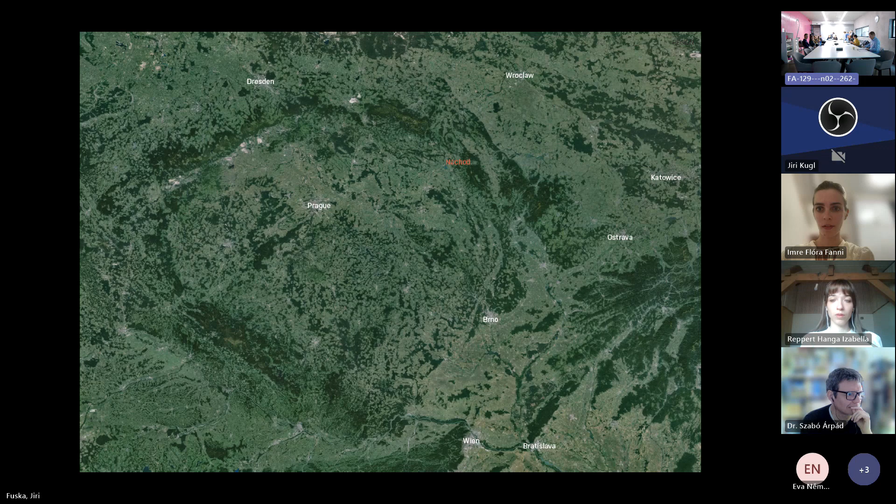It's on the border of the Czech Republic and Poland, right in the middle between Wrocław and Prague. It's an old industry city with a rich history of textile industry, still with a lot of remains of textile buildings, great big textile buildings. But it's lost its character, the buildings are empty and all the industry is gone. Today it's only a gateway to Poland for trucks, with this main road in the middle of the city going from east to west, so it's full of trucks.

So we are looking for some new character for the city, some new feel for the city, some new approach and goal, so the city has some future.

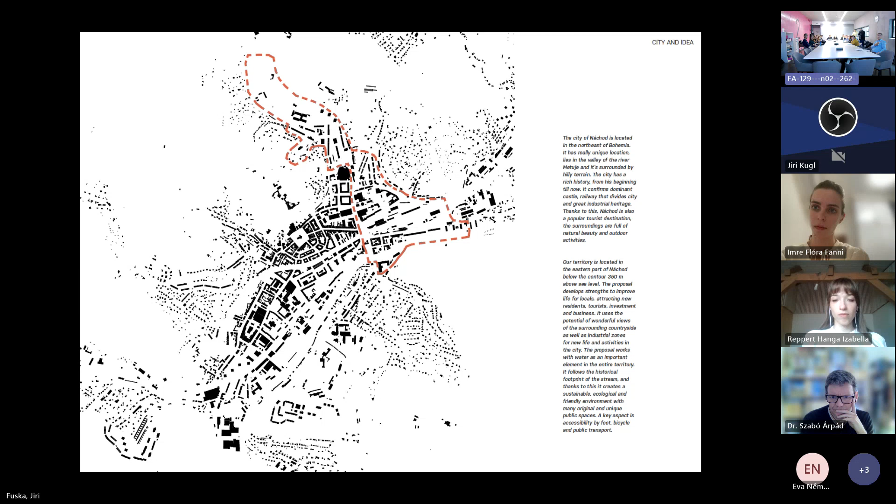Our group chose this part of the city, on the east part of the city with the train station and the panel houses real estate. As you can see, it's just next to the old city of Náchod, and it's pretty much low density in the built-up area, but of course the panel houses are high density.

So our approach was that the city shouldn't go further into the hills, where nowadays a lot of new family houses are built, but should stay in the valley underneath the hills. So, following the contour lines at 350 meters above sea level, we chose to densify this part of the city on the flat area.

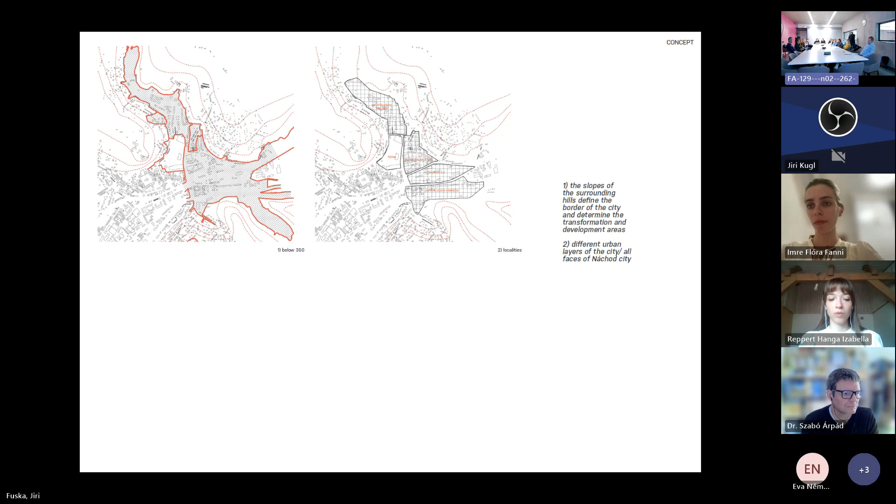We divide the city into districts with their own characters. On the north there are the panel house estates. On the south there is Tepna, the old industry textile fabric - there is already a project on it, so we just copied the project that won the competition. Then there's the industry area and all the brownfield around the train station, and on the south, the river banks around the river.

One of the main subjects of our proposal was how to behave towards the train station and the train tracks. In the future there should be a higher speed railway, so it will be quickly connected to Wrocław and Prague. So there's some potential for the brownfield and for the whole city.

Also, our colleagues in the studio were working on these viaducts under the railways. We found the local centers and added some more, so it's a short distance city.

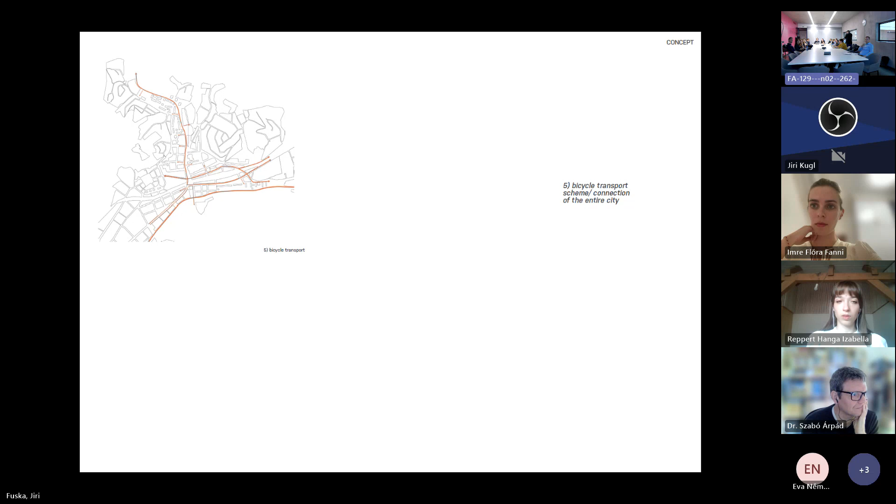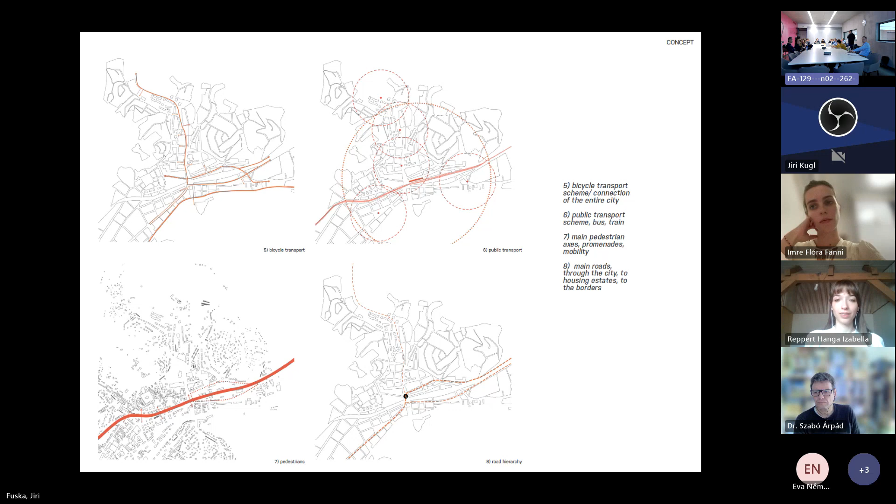Because it's a flat area, we think the big potential is in bicycle transport, so we made new bicycle trails and create new public transport. Because of a new city ring which is planned and will be built, it should take the trucks away from the city, so we created a new hierarchy for the roads in the city.

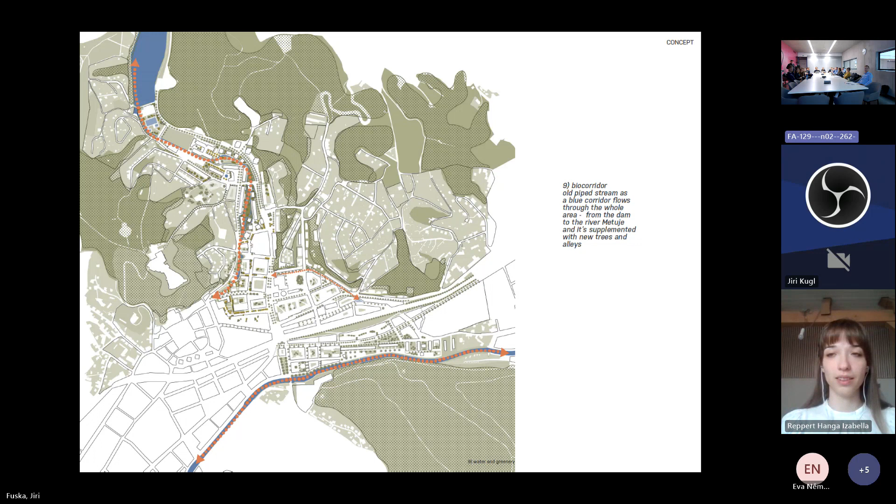Most important is this new welcoming of nature into the city, creating new bio-corridors into the city, so you can walk through the whole city, or part of it, in nature, in the city - something in between. So everything is close to nature, creating new pleasant public spaces.

So this is our proposal. We will start with the north part of the panel house estate, where we add low-rise buildings to be able to finance and create control around the public space, because nowadays it's just a vast area of grass that isn't used - it's just grassland, and in the future it's a question whether grass is something suitable.

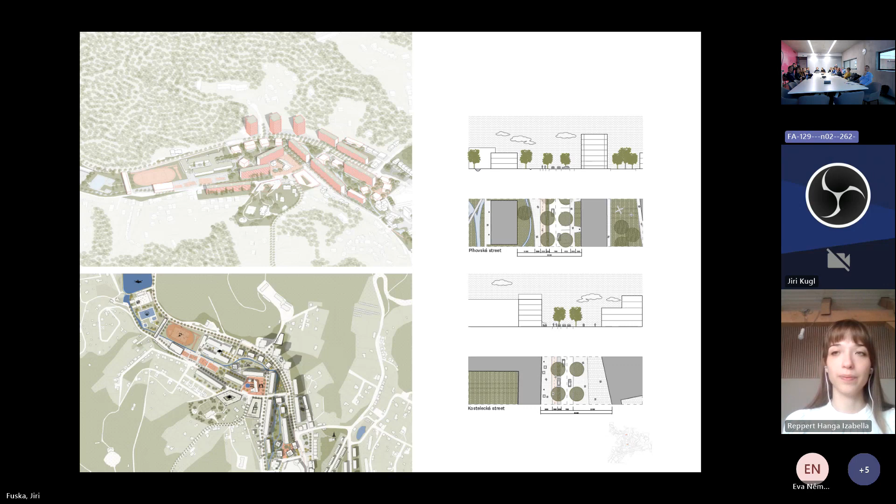So we open the river, which is now in pipes underneath the ground, and create a new sporting area and park around the panel houses. There's new biodiversity between the panel houses, and we create new low-rise buildings which take control around them.

So as we saw, there are 4 parts of the district. This is the second one, the industrial part, nearby the train station, where there's a heating plant. We want to build new public space, or keep the industrial heritage here but make active public space with it. The heating plant is still active, so we mostly focus on public space.

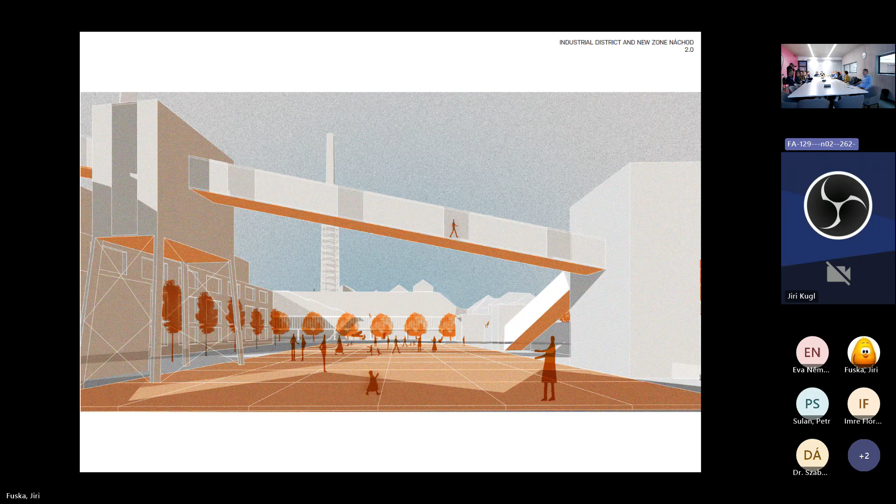For this, we want to focus on offering more opportunities to choose different types of housing, and mixing functions. It's mostly about having an industrial vibe with craft - on the basement there are working places for workers, and upstairs are living spaces.

So the next part is the brownfield part, for the train station. We want to show connectivity and access from the center to the new business and train station part.

So, we're sorry, we have to come to some conclusions. If you have any conclusions or questions, eventually, if there's something you'd like to stress, yes, it's okay. So really quick, I can finish it.

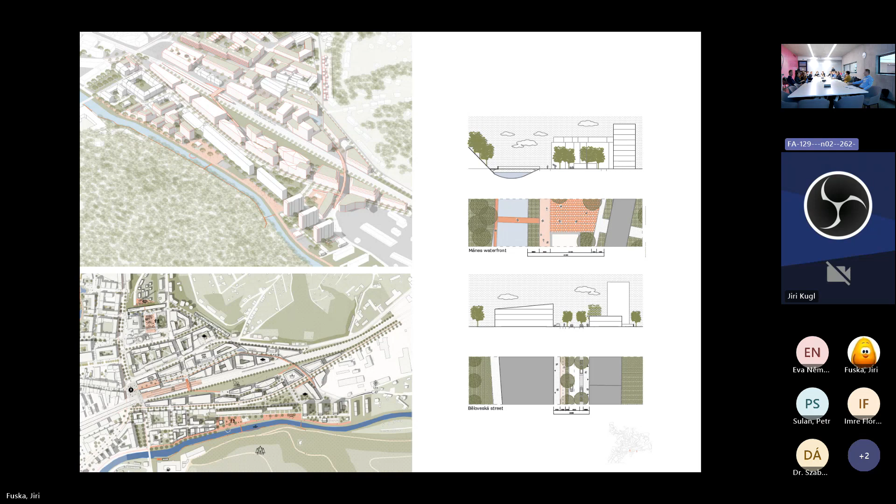It was also very important for us to work on the connection with other parts of the city which we didn't work on, like the spa and the western part of the city. So I think that's all. Thank you for now.

So, any questions or comments? I might have one question regarding cooperation with the municipality - did you communicate your projects with local experts or politicians, or did it work? Yeah, we had some feedback from the vice mayor, and he gave feedback for whole studio, saying that this is a good proposal and it's realistic, but there are still some utopic ideas that he didn't seem to believe. So that's okay, but they saw it.

I'd like to ask, you probably expect increasing population in Náchod because you're building new houses - was some basic facilities also included in your proposal? I mean kindergartens, basic schools, things like that. In every district we identify and find a place for the kindergarten, schools, offices, shops, and culture, and we calculate if it will accommodate the newcomers and all the new citizens of Náchod.

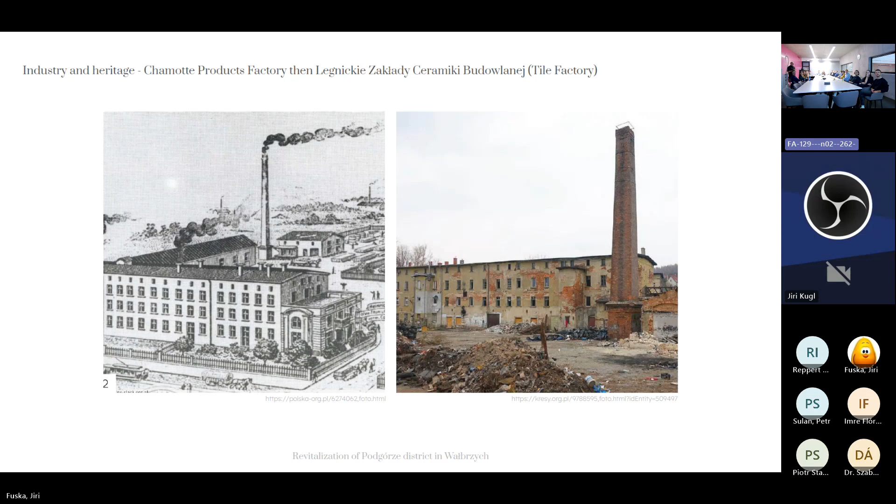Another example is a former tile factory, which is completely ruined and unfortunately waiting for demolition due to its poor technical condition.

Another, the last example, is the spatial accent of this district: an old steel viaduct, which is the gate to the city and also serves as the ending point of the axis of Main Street.

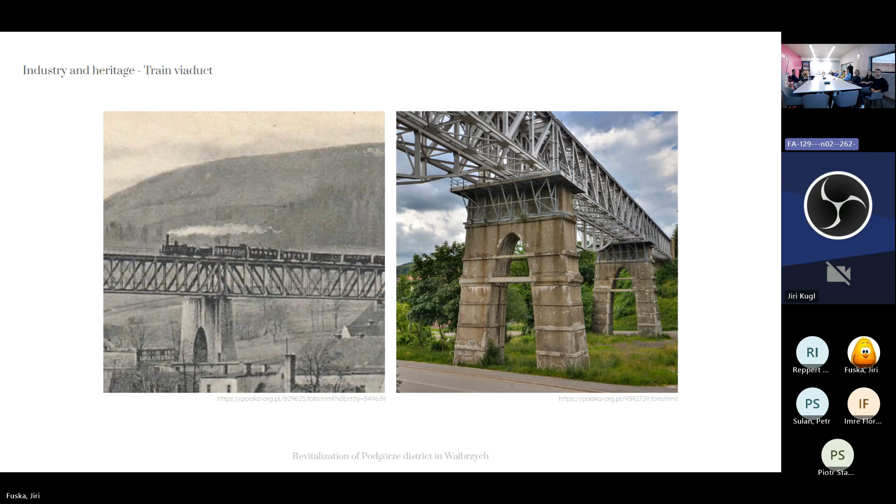But in our opinion, it doesn't answer the real problem, which is car traffic, air pollution, and noise pollution.

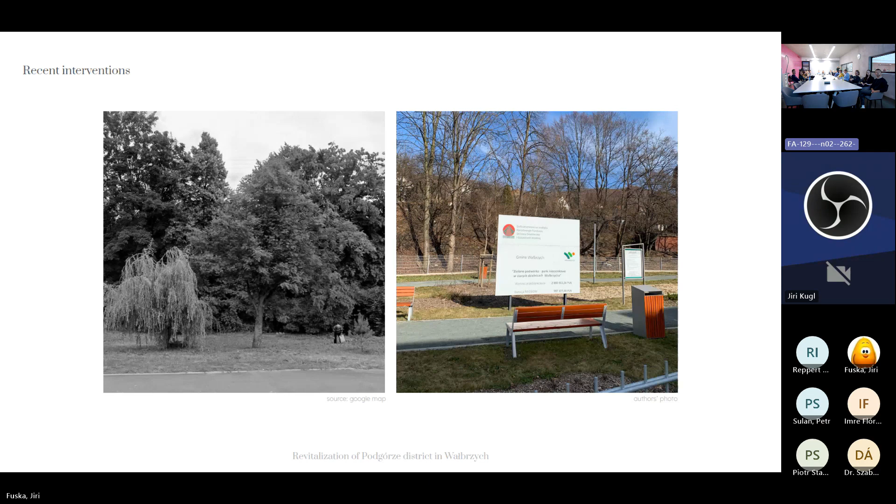It is very inhospitable, so in our project we wanted to avoid such situations. We observed that the city needs to become pedestrian friendly, with various functional greenery spaces and spaces for people to actually spend time there. We observed that the former glory of the city should be brought back.

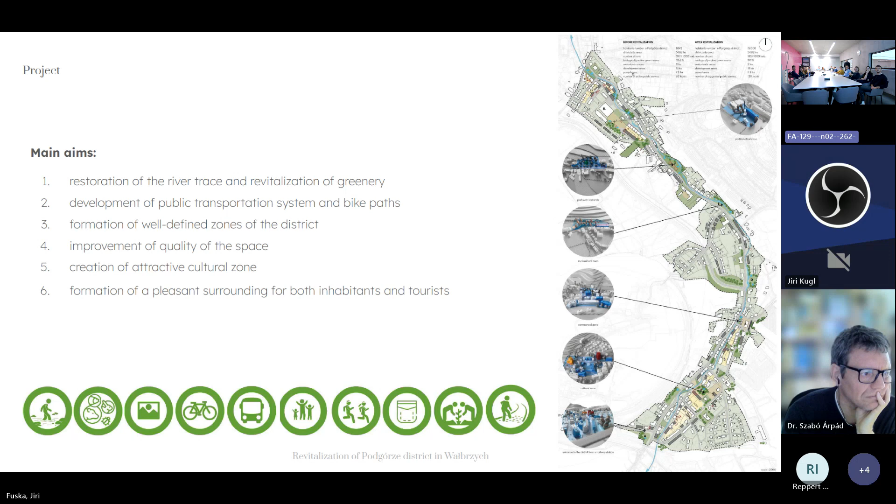In order to achieve it, we came up with these main aims: first of all, restoration of the river trace and revitalization of greenery, development of the public transport system and bike paths, but also formation of well-defined zones that would improve the structure of the district and make it more coherent.

That is why we established four stages of revitalization. The first stage focused more on restoring the river trace that is currently hidden under the street.

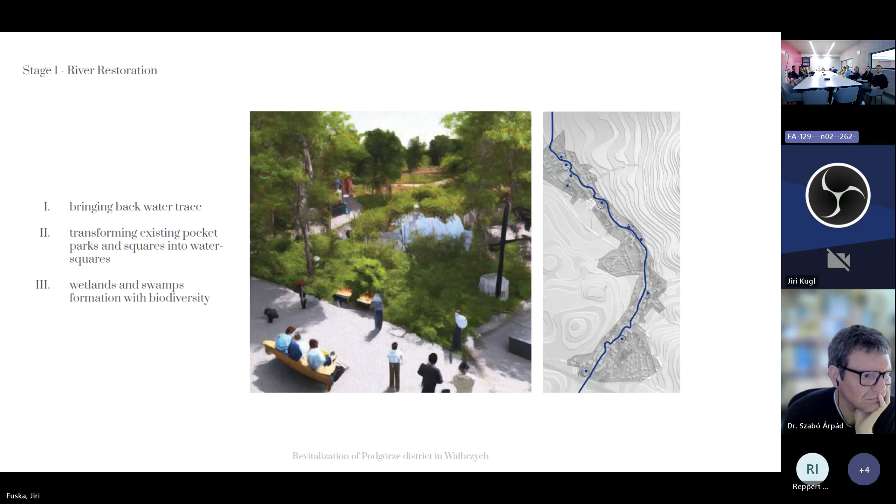Our main objective was to reintroduce the river to its natural state and provide a valuable green area for the inhabitants. We also proposed transformation of existing pocket parks and organized green areas into water squares and swamps to increase biodiversity.

The second stage of the project aimed to improve the quality of the existing commercial zone. We focused on providing functional space for various activities such as shopping, dining, and entertainment, and our goal was to create a representative square that attracts not only the local community, but also tourists.

Right now, the street is ruled by cars and most services are connected to motorization. So to make it more pedestrian friendly and safe, we allocated more space for recreational areas, restaurant gardens, and a city square.

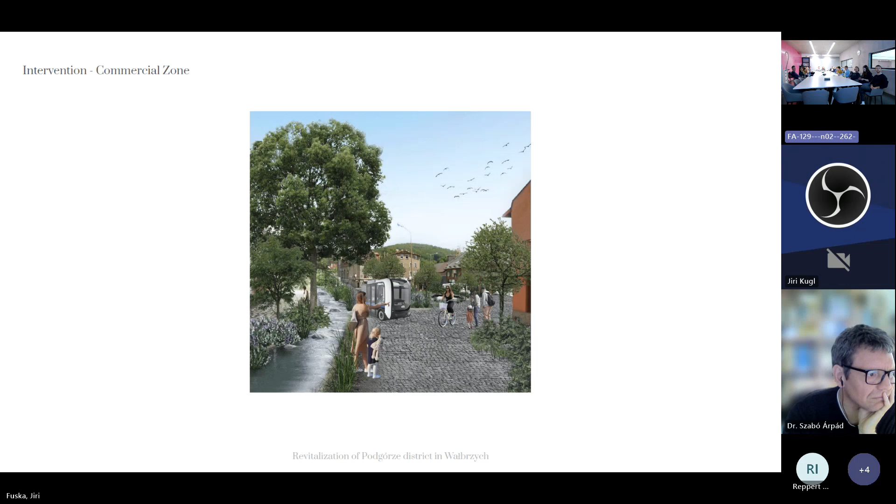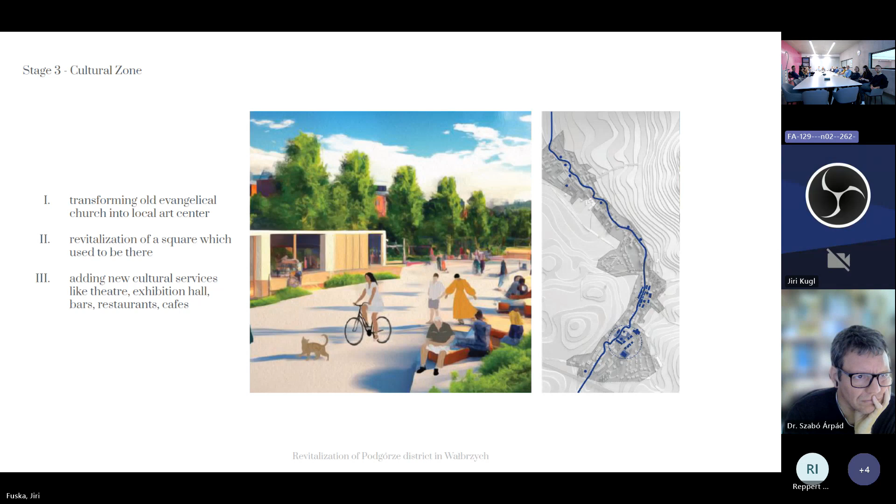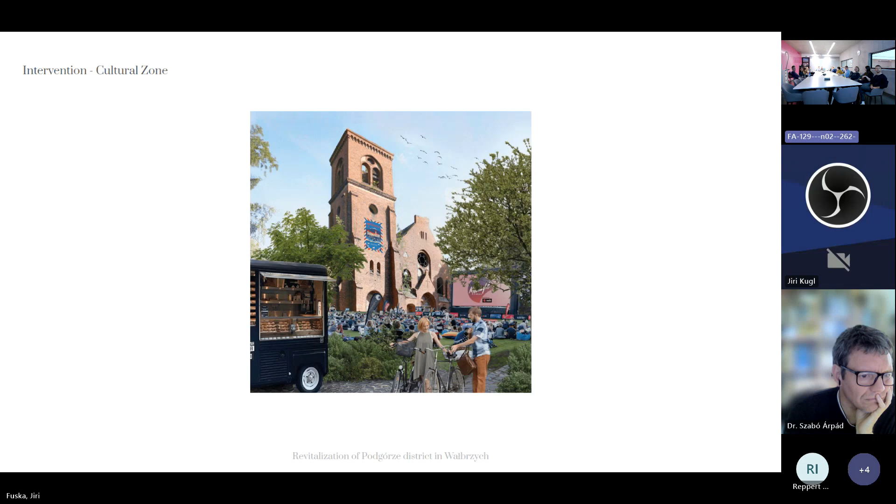So we already have functional greenery, diverse greenery. We have a commercial zone, which serves as an engine of economic activities and the heart of the district. So we need a soul of a district, and we thought that the soul could be a cultural zone. We chose a zone close to the old evangelical church, which we believe might be transformed into a cultural hub for people's integration, raising their knowledge about the cultural identity of Wałbrzych, and making people stay in the city. If we achieve this objective of keeping people in the city, we would need more job opportunities for them, but also housing estates.

That brings me to the final stage, which is industrial zone revitalization. In this particular area, we are transforming it into a multi-functional mixed-use development with green spaces, community gardens, and spaces to integrate.

In conclusion, what I can say about this project is that we know it's very ambitious and requires great funds, but with collaboration between various parties such as local government, activists, and through participation processes, it can actually be improved. The change might be done. Our goal was to make this catalog of universal solutions that might be implemented not only in Podgórze district, but also in different districts or towns in Poland or in Europe with similar potential and solutions.

Thank you very much.

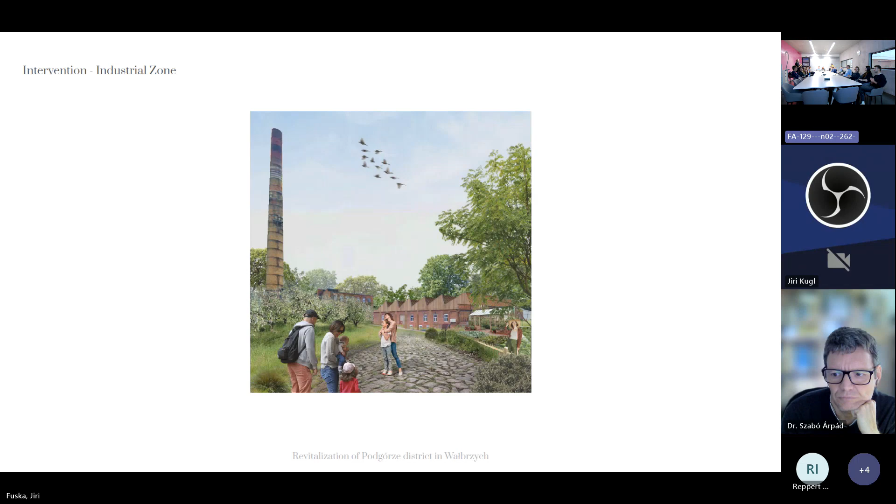Any questions? Maybe I can start with one. You worked a lot with greenery and public spaces—did you consult it with some experts, or how did it work?

Yes, there were already prepared analyses from the City Council of Wałbrzych. Based on the information we read and saw there, we tried to improve their solutions and propose our strategies. They really focused on greenery in the city and on unused green areas in the city center, which have huge potential to create something there. Also, Wałbrzych is located in this hilly surrounding, so it was important to emphasize that, and in Podgórze district there are a lot of green spaces—I think it's one of the greenest districts in Wałbrzych. So it was crucial to emphasize it and give this space to local inhabitants.

A few centuries ago, this city was the region where people went to rest—there was this kind of wellness center. So we thought it could be a really good solution for this city to create very friendly, very green zones for the inhabitants and also tourists.

So hello everybody, and thank you for the opportunity to be here and for the prize we were awarded. We are going to introduce our urban design called Rivulus Houses.

In the last decade, the southern part of Budapest's industrial zone, especially the Buda side, was the main target area for real estate investments. The unused brownfield areas that can be converted more easily have been transformed into extremely densely built up residential and office areas. In our one semester long design project, our task was to create an urban development for the area located in the southeastern part of the 11th district between Szerémi Street and the Danube Bank.

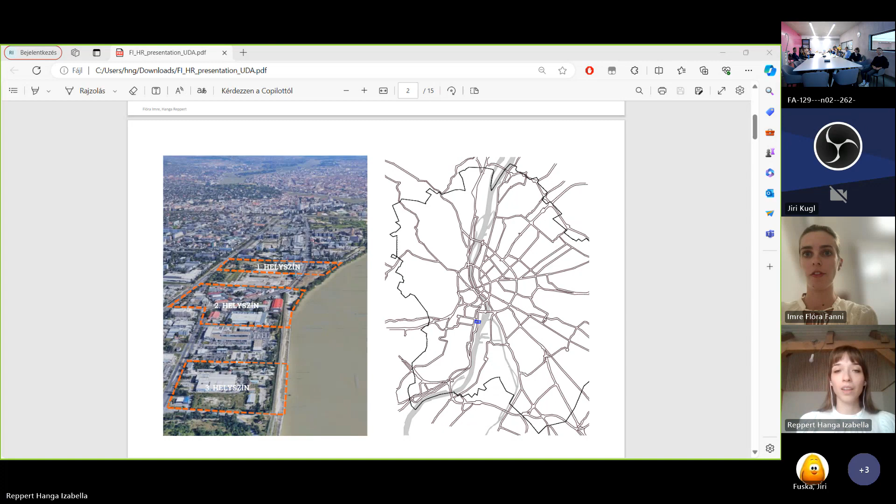In the part of the area that is closer to the Danube and therefore more valuable, there's an everyday tension between the use of high prestige residential complexes and office buildings and industrial service areas that are stuck in a degraded state. During the semester, we had to apply sustainable planning strategies that promote the transformation of the remaining brownfield blocks into urban and mixed areas.

At the beginning of our designing project, we conducted research and observation around our chosen site, which was previously a factory site where pre-made concrete structures were made. Our research can be summarized in 3 main points.

Firstly, this area offers excellent public transport opportunities, and there's a development for increasing bicycle traffic volume. Secondly, there's a huge demand for a more accessible Danube Bank, because now it's currently very blocked from the residents who really want to have a space where they can recreate and escape from the noisy city.

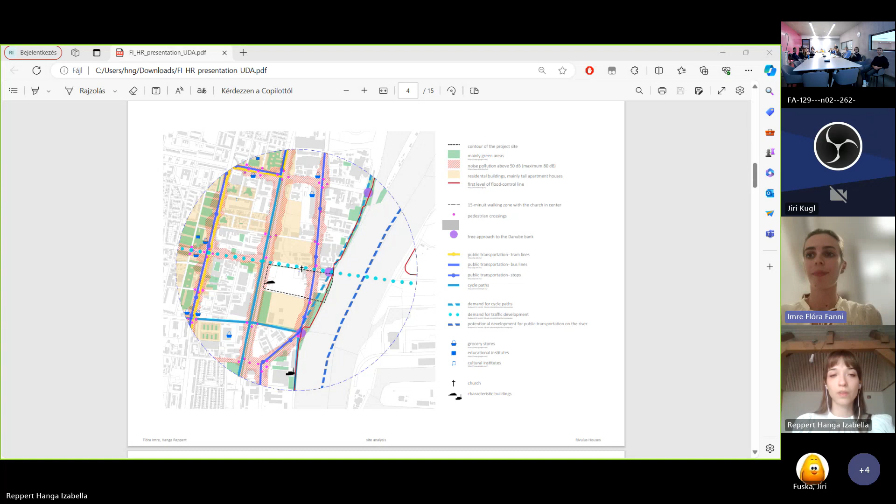And lastly, as this part of Budapest called Budafok is a priority development area according to the Budapest Urban Development Strategy, high-rise apartment blocks and office buildings are being constructed. In the very neighboring plot, there's a huge investment that started construction in 2018.

We believe that while these projects are really large in scale, they tend to lack more human-centered and smaller scale elements. So we felt the need to design something more human-scaled and welcoming to enhance the diversity of Budafok and create a gentle connection to the Danube Bank.

We consider low-rise, high-density estates to be built structures that represent our aim of creating something more human-scaled. Following research, we selected terraced houses as our starting point and analyzed the traditional sequence of areas inside one unit of terraced houses.

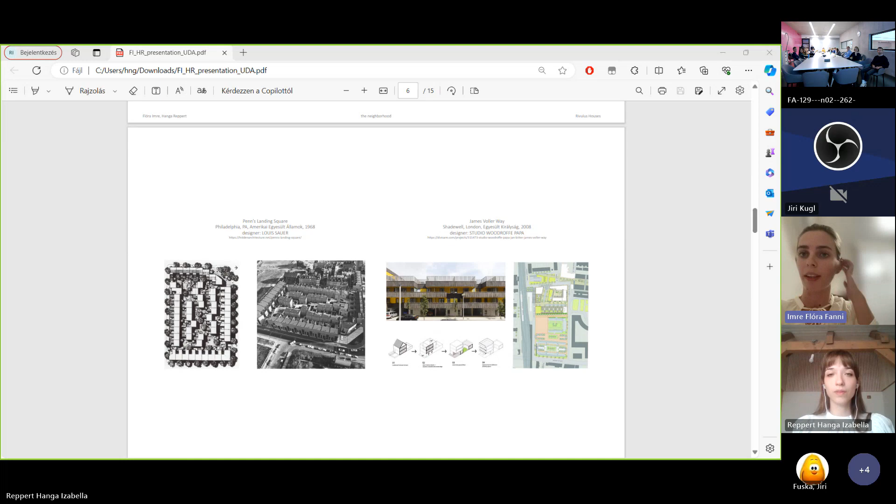So here we present 2 of our main references. The first is a very typical terraced house system, and the second is a design where townhouses and terraced houses and its concept are blended together and expanded upon.

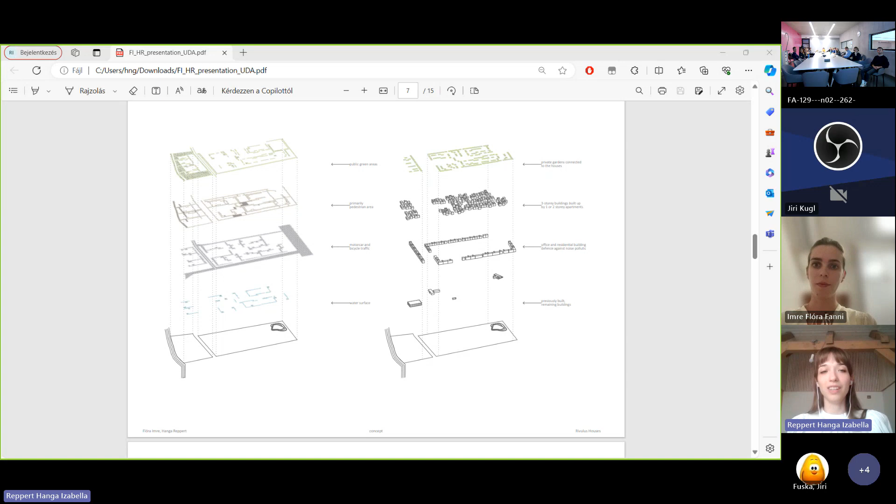We also dreamed of such a terrace house structure, but only the layer structure in the classical sense was designed by us, stretched out into new dimensions. The strip system is expanded with green areas shared by the residents of the district, a pedestrian walkway, and a water surface. Due to the more appropriate layout, these lanes are not strictly connected to the house, but rather form layers for the entire system, as you can see here.

The lot is bordered by relatively busy roads from the south, west, and north, and we wanted to delimit the inner residential areas from these. But in addition, we also had to find a solution that would allow the residents and all people passing by to easily use the Danube Bank and reach services in the neighborhood as well.

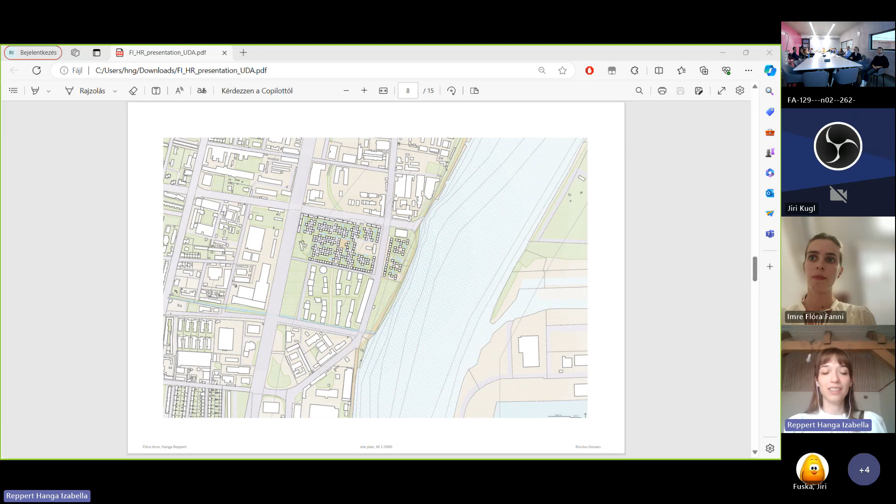So apart from residentials, there are non-residential buildings in our project to create a system that is good for a 20 or 15-minute city. Alongside office buildings, shops, services, community buildings, and buildings with real co-housing functions are placed there. People can use it for gyms or workshop places, for common kitchens, and for other co-housing functions to create a community in this area.

So these buildings can be used by the residents of the estate.

The complex really operates like a horizontally laid out high-rise multi-story apartment block. These layered structures provide private gardens for each building, containing 2 or 3 apartments along with optional roof access. Our design aims to create a neighborhood with diverse spatial experiences, offering both smaller and larger outdoor public spaces instead of adhering strictly to rows of terrace houses.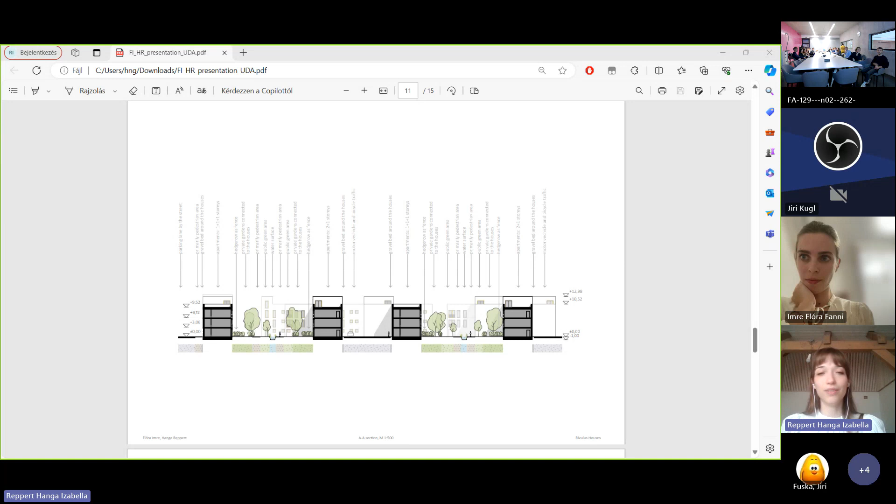So on to the next slide. As depicted in this section drawing, the water area is also integrated into our layer strip system, and the space for cars is eliminated from the green public areas. So the gardens, covered walking paths, squares, and public green and water areas can be easily connected together, and thus children could play freely outside and residents can enjoy a carefree time with reduced motor noise because of this.

As mentioned, we felt the need to design a more human-scaled, welcoming district. This, in addition to the important urban components, offers extra community opportunities and spaces, and thereby contributes to the comfortable everyday life of the residents here.

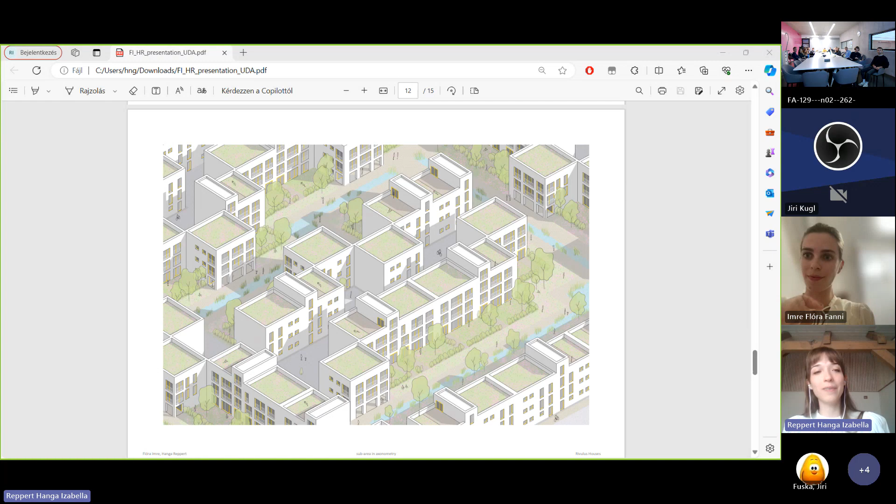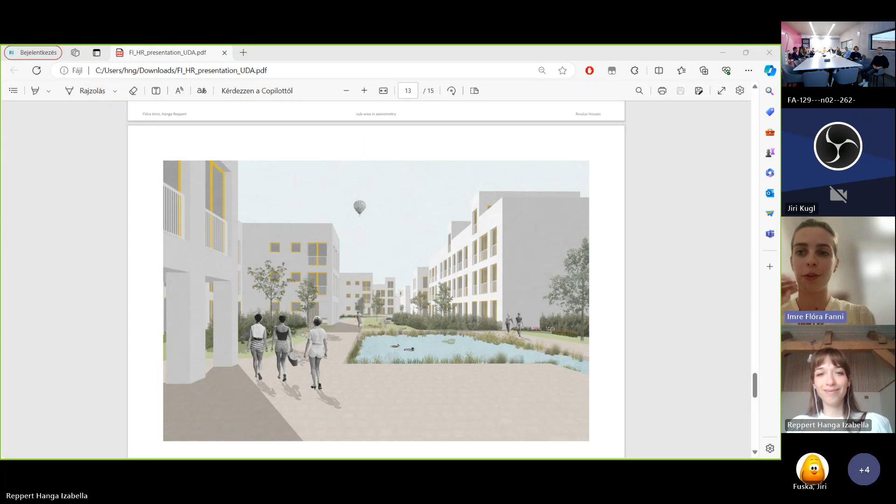So I think we are out of time, so I'll just summarize in two really short sentences. The gist of this project is that it's a solution with a density corresponding to sustainable urban planning in the capital of Hungary, but on a much more human scale, so people can find a home there where they can feel an urban atmosphere situated between the density and the suburbs. So we really wanted to create a very family-friendly district without forcing residents to move to the agglomeration or the suburbs.

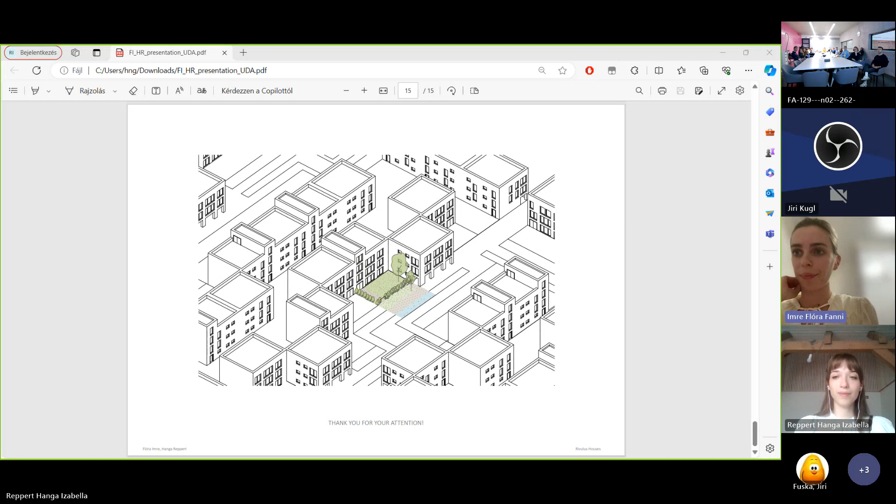We designed 400 flats in this whole estate, and the neighboring plot I was showing you was the first part of the project. In the whole project there would be around 800 or 1,000 flats, so it can be related to it. I can also look up another number we calculated: the floor area ratio, which for the most dense part was 0.85. So that was our goal, to create this floor area ratio around 1, and that was actually the task in the semester. That was our main goal.

Thank you. There is one more question, yeah?

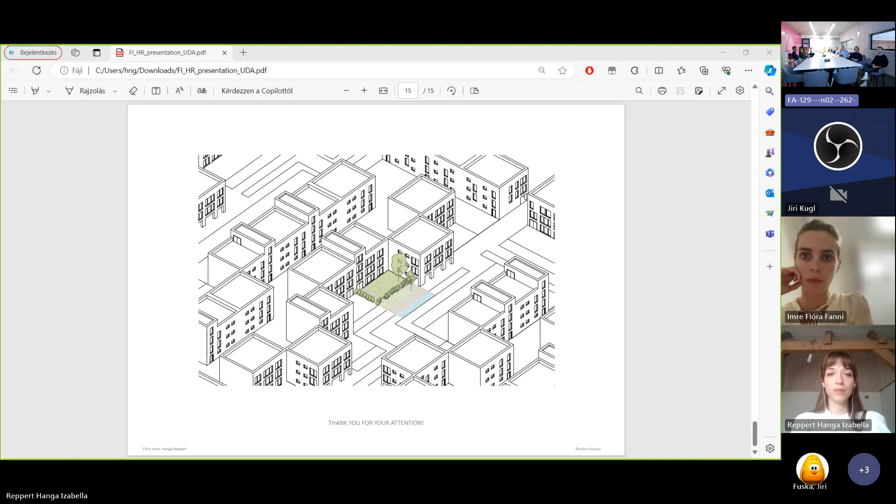I would like to ask, because I could see that from the same start of your project, you had that block delimited for your design. Was there also some consideration of the broader relations, how this proposal will be linked to the surrounding area? Or was there some more general strategy or development scheme of the area in which you fit your proposal? If you understand my question.

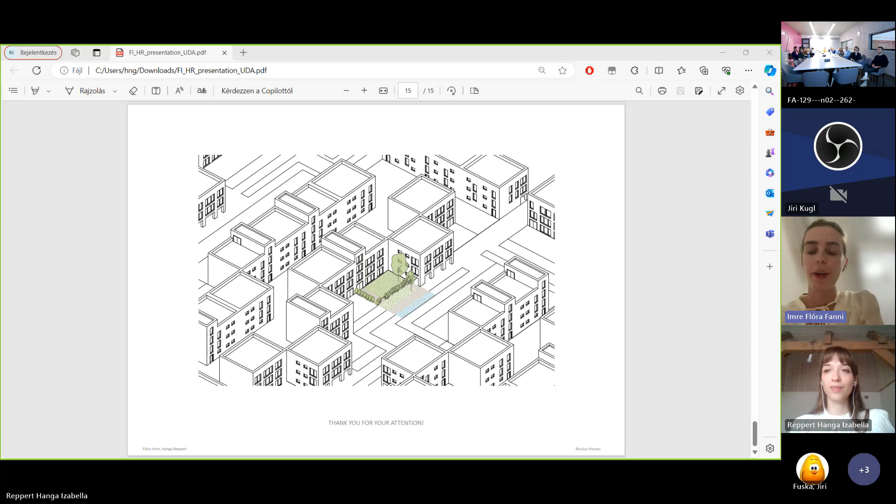I think I understand, and I'll try to give you an answer. It's not seen in this slide, but we created small gaps in the surrounding office buildings for other residents from other estates and parts of this area, so they can go into this estate and reach the main square as well. To locate it in the whole district, there are other low-rise, high-density estates just around 15 minutes from there. But I think our goal was really to create something else.

To be honest, I have to tell that we were a bit naive, and we had a vision to create something more human-centered and human-scaled. For us it was a bit like a love project, to create something new, something that we enjoy, and not another part of a city with really high-rise buildings that are really common nowadays in Budapest.

Hello. A year ago, I was working on a project for Croatia with Lukáš Mottl. Unfortunately, Lukáš is not here today, but he sends his greetings from Italy, and he also created this presentation.

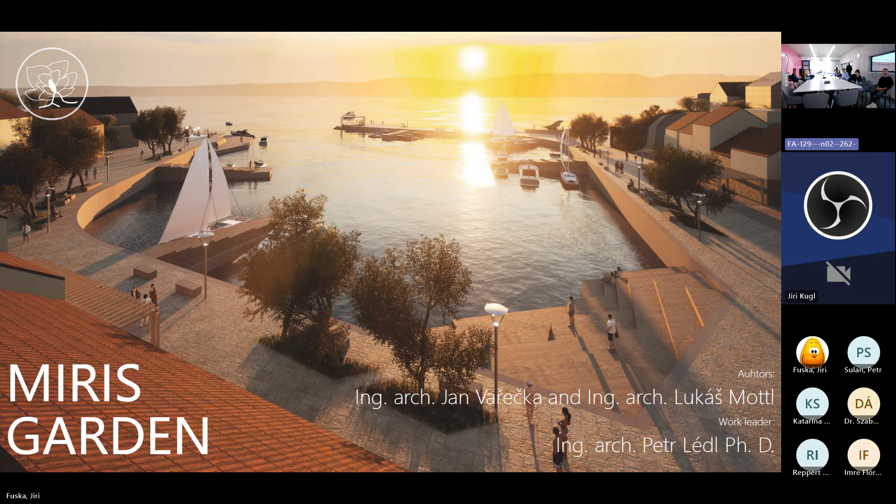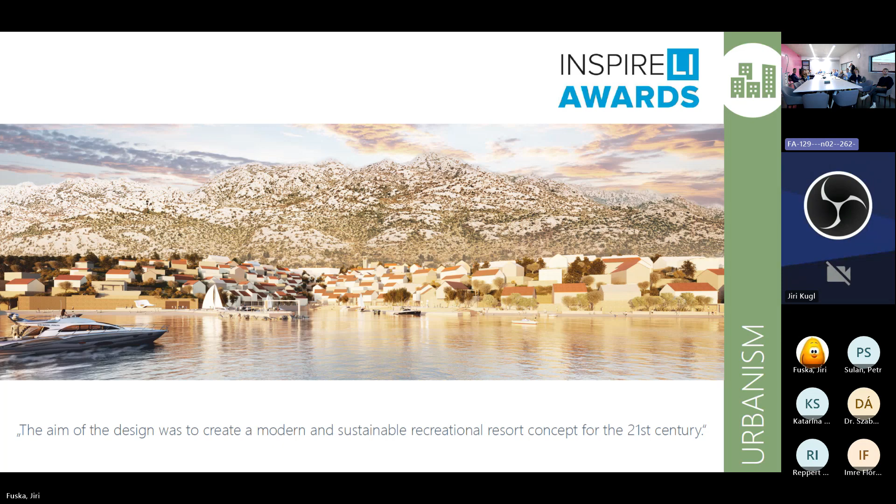The whole topic is to create a modern, sustainable recreational resort concept for the 21st century, provided by the Inspireli competition, where we took first place in urban planning. This is the view of the whole area we created, from the sea.

The area in question is located on the Adriatic coast, about 30 kilometers from the city of Zadar, in the smaller town of Starigrad. The history of the town dates back to antique times. In addition to historical monuments such as remains of city walls and gates, Starigrad also offers beautiful beaches and tourist attractions. Starigrad is the capital of the Paklenica Riviera, named after the adjacent national park. The Riviera stands out for its incredible blend of landscapes and high mountains, with an incredible atmosphere here.

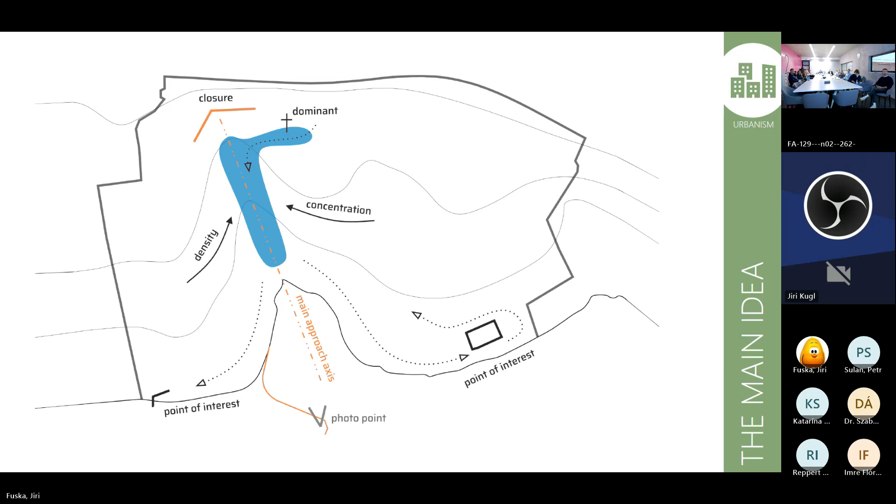The pedestrian road leads from the sea to the highest dominant point on the relief, on which, according to tradition in Croatia, is a chapel.

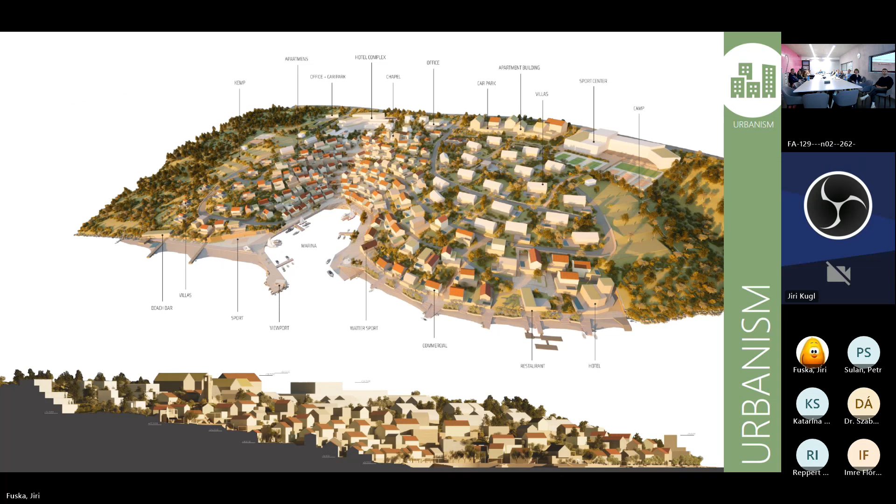This is the situation plan with access axis and composition of individual houses, hotels, sports center, etc.

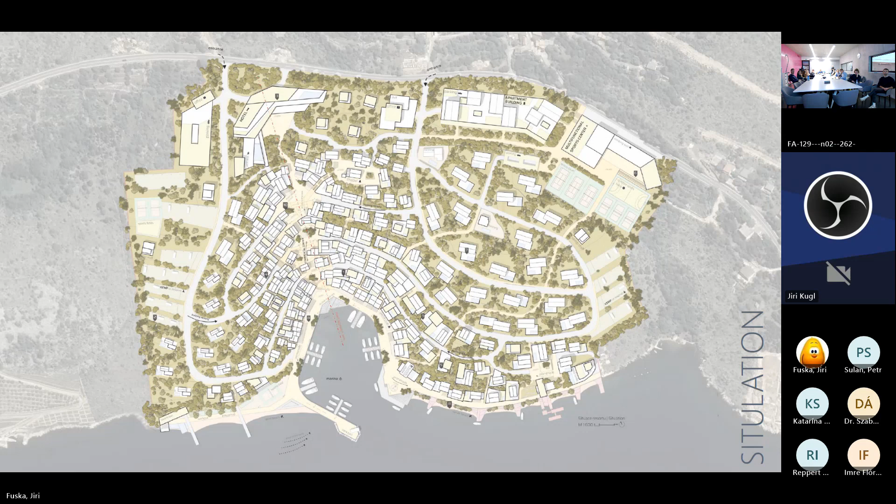And the visualization of the main square under the chapel.

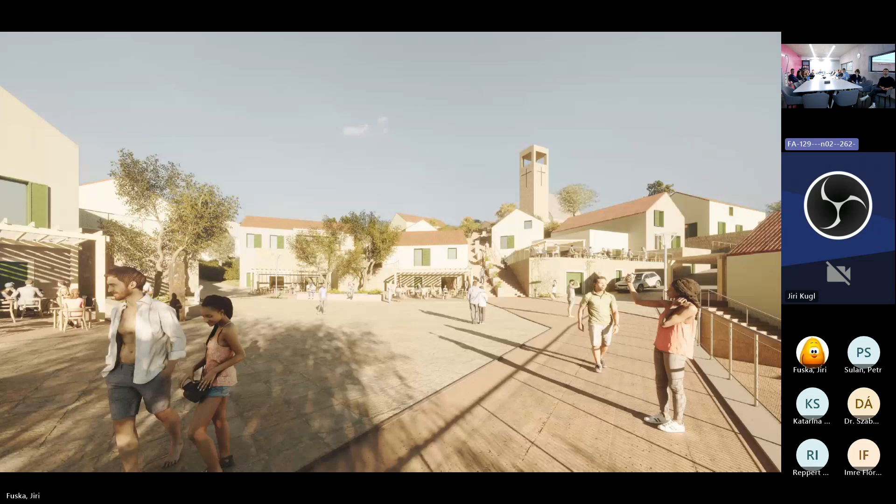There is the use of the resort. You can look, you can see all types of buildings.

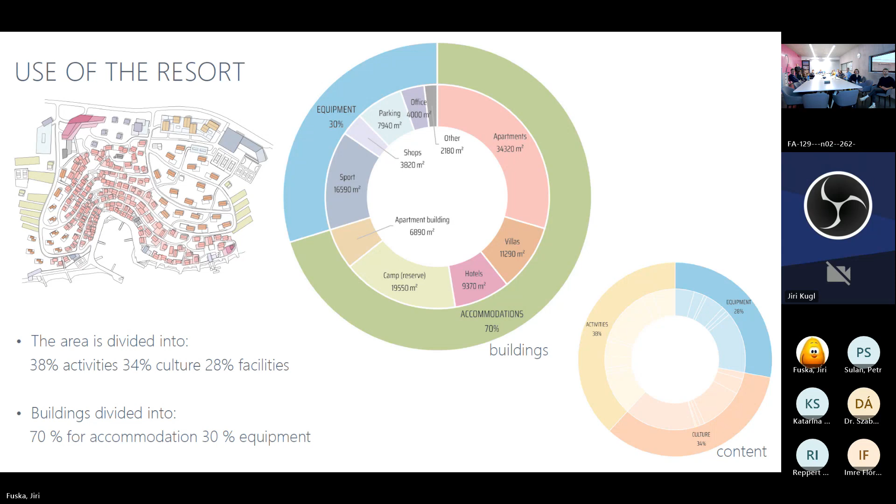We have shown the use of the whole resort is about 70% accommodation and 30% equipment. And we further break it down so that the whole area is more multifunctional, well usable in different seasons for different people, different times of day, etc.

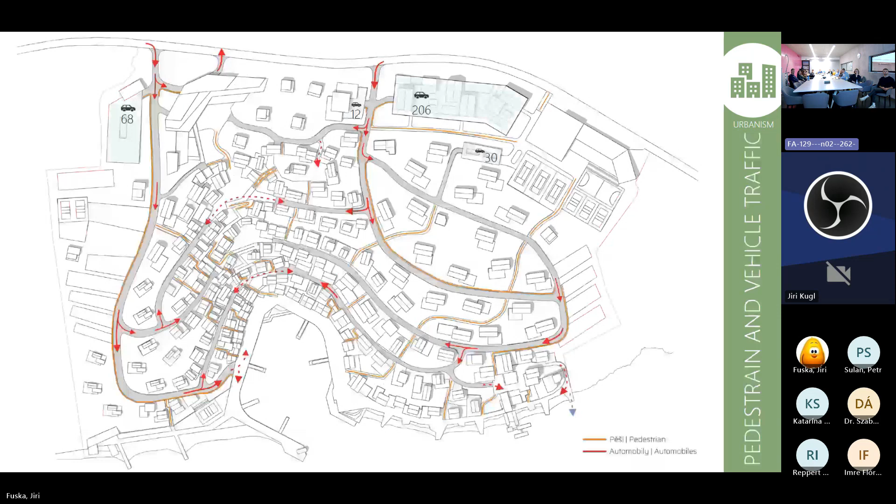And thank you for the attention and the opportunity to be here. Thank you.

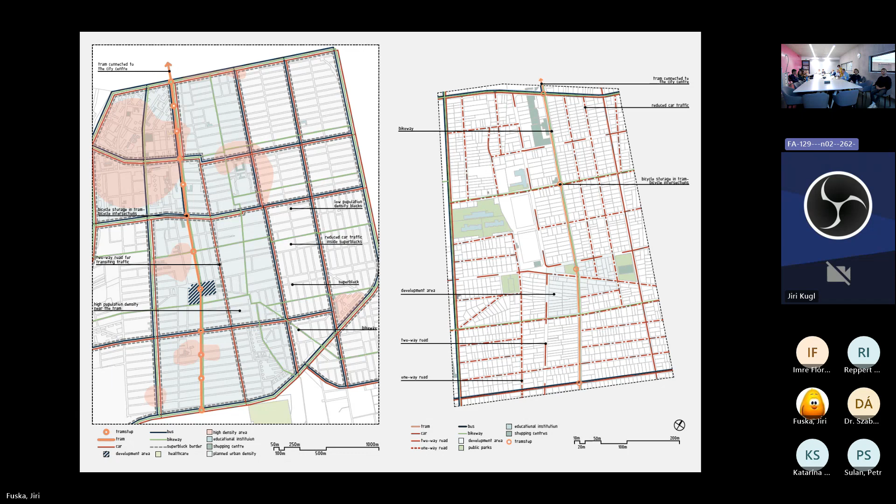Before we zoom into the designed area, we would like to give you a short summary of our design approach.

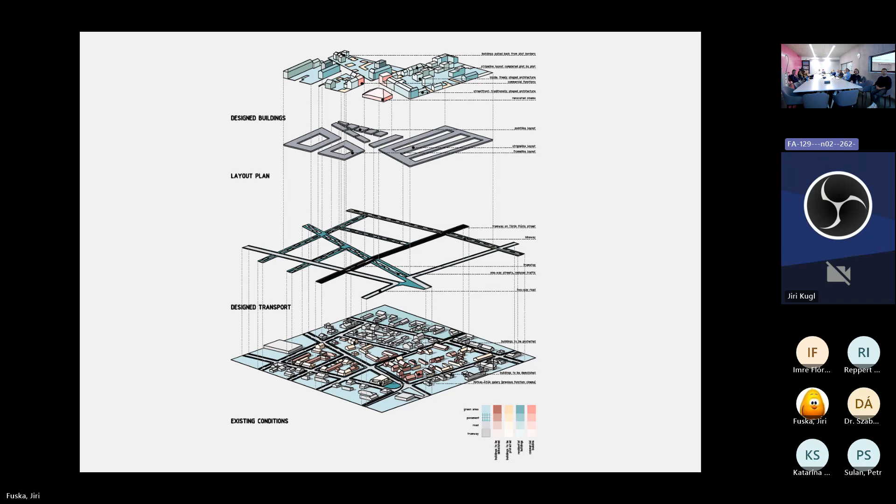So we conducted a research about the existing buildings, designed a new traffic infrastructure, created a layout plan which regulates where the buildings can be built, and with all this information combined, we could plan a new city.

On this slide on the left side, you can see the existing transportation system, which is clearly dominated by cars. A lot of cars park on the streets, and there are a lot of pavemented areas that disturb green surfaces. So in our approach, we try to fix these problems.

On the right side, we designed one-way car roads that have frequent pavement changes in intersections, and also have green surfaces sticking into them, making them more narrow. This way we can slow down car traffic.

We could do these, we could say, unfriendly actions against car users, because we have developed the alternative so much that it won't harm their actual daily life. Also, we have placed underground garages that can support the new residents, and of course left the two-way car roads that can give a way for the residents to leave this district.

On this slide, there is the building analysis, where we categorize the buildings into two categories: one is the protected buildings, and the other one is for buildings that need to be demolished. If a building had a great position that fits into our layout plan, has architectural values, or has a high real estate value, we said that it should remain untouched.

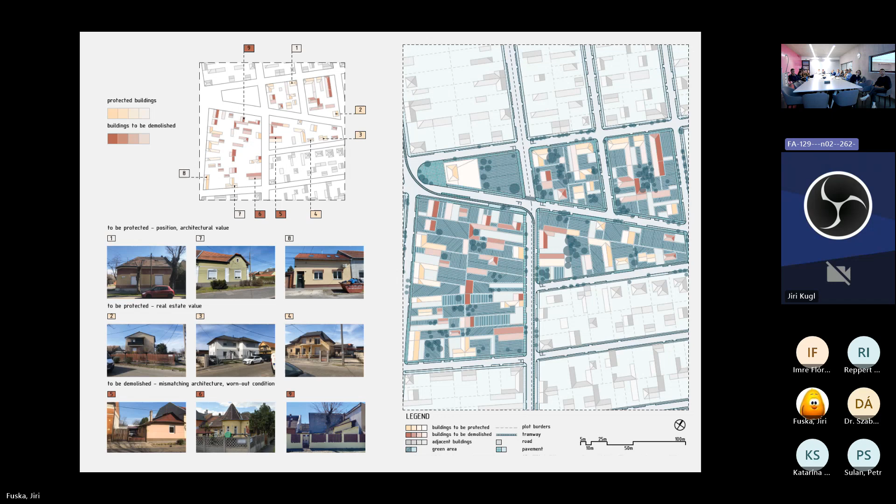On the left, you can see the layout plan, which regulates where the buildings can be built. In the gray stripes, 60-meter tall buildings can be built, which will result in a density increase in this area.

In the smaller blocks, we wanted to use frame-like structures, and in that very big block on the left side, we implemented a stripe-like layout.

On the right, you can see our designed buildings, which contains residential buildings, the protected buildings, commercial buildings, and the new traffic infrastructure. We had the idea that next to the tram stop, a concentration of commercial buildings will emerge, and that will be the center of the 15-minute city in our area.

If we zoom in further, you can see how these blocks actually work. There are multiple paths, large continuous green areas, which contain private and public gardens, commercial buildings with offices, grocery stores, and businesses.

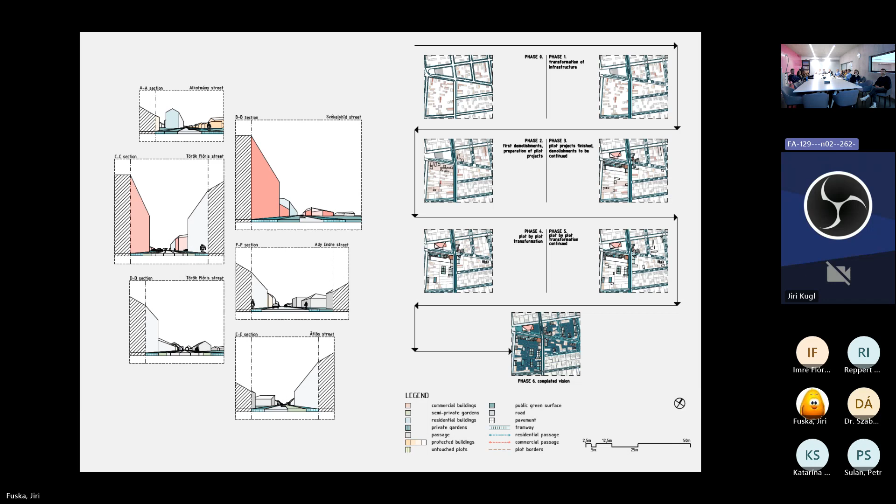After all these have happened, the neighboring plots increase in value, which is good for the residents who stay, and it will also attract investors who can get a great return on their investment, because in our layout plan they will be able to build more apartments into one plot instead of just one in the existing conditions. By that, we believe a plot by plot continuous development of the area can happen, and our complete vision can occur.

These are some visuals that represent that we wanted to keep the architectural characteristics of this district. So we said that on the borders of each layout, there should be pitched roof buildings if they are residential, and on the inside we gave place for a new, more modern and freely formed architecture.

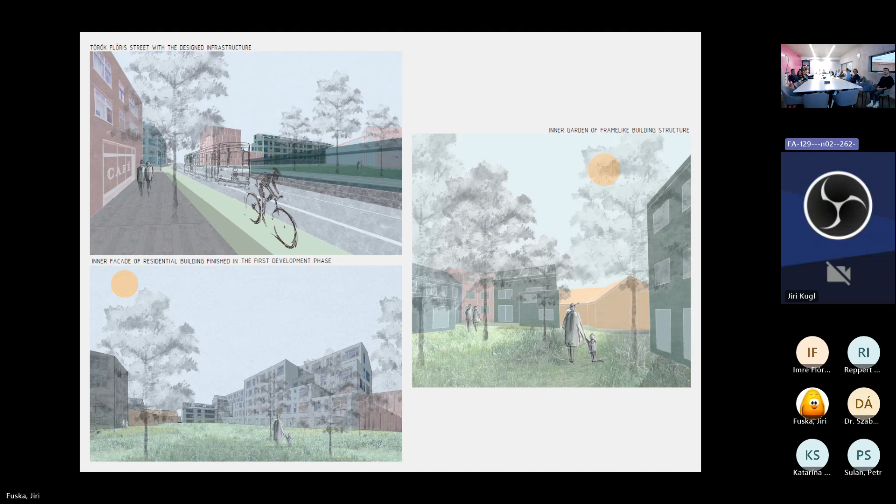Another thing I wanted to ask, because I particularly like your graphic design - which software do you use for those diagrams, the diagrams on maps? Well, it's ArchiCAD. Just ArchiCAD, just. Okay, nice.

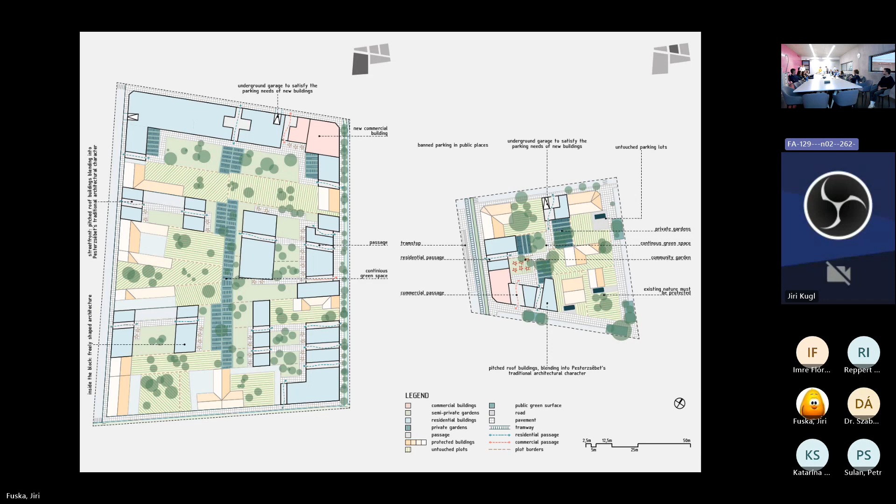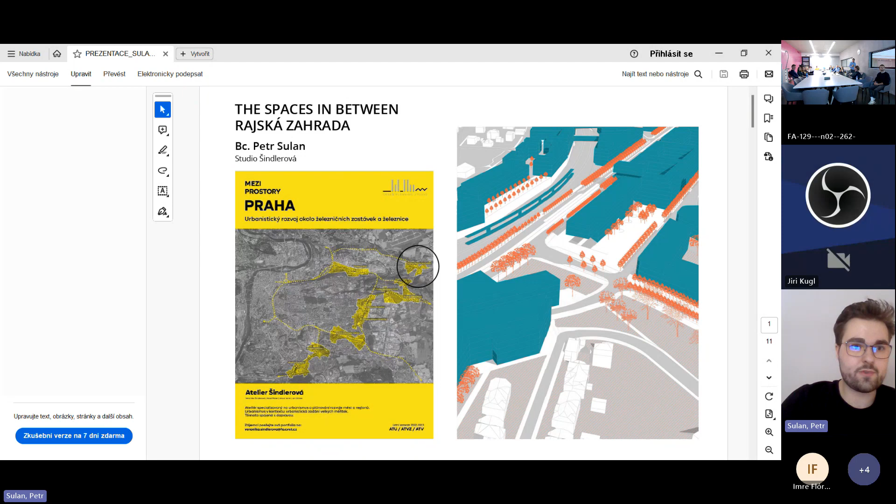Yeah, hello, can you hear me? Oh, so now it's your presentation. Yeah, great, I will just share the presentation. Can you see the presentation? Yes, great. I will just, sorry, my keyboard is not really working, so I'm trying to. Can you still see it?

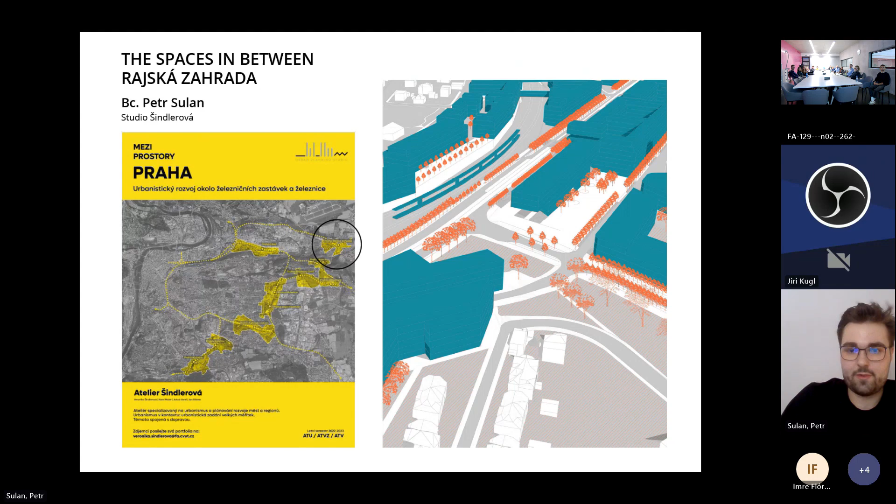I will go to this orthophoto. I would like to show that this area right now is like a really wasted space, because there are a lot of areas with panel house estates or family house areas, and they are not really connected - they are somehow covered in front of each other.

They really don't interact, and there's this Chlumecká Street that goes through the area, which is a huge barrier together with the railway and also with the metro station. Here I have some pictures to show you the atmosphere in the area.

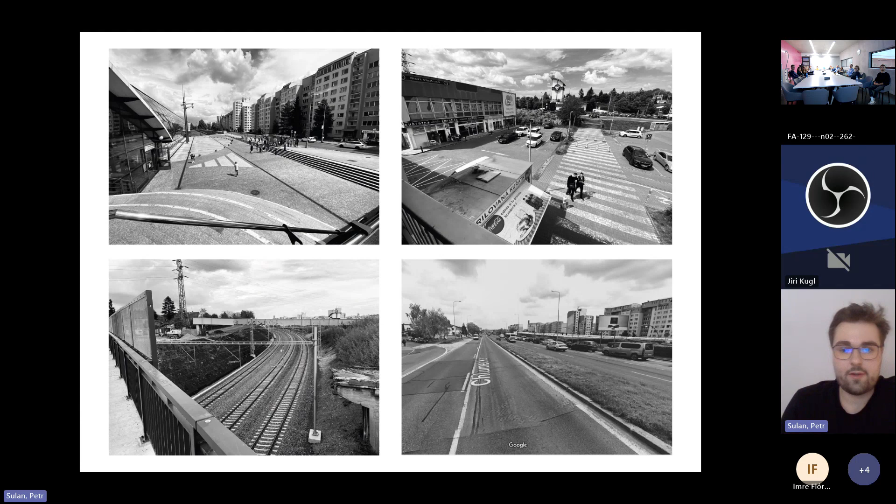The main problem is that there is a lot of waste space, if I can call it that. There are a lot of barriers with the streets. The metro goes actually above the ground in a tube, which is hard to cross. There are only one or two crossings along the tube, so I mainly worked with those barriers. Also, there are a lot of parking lots and not really urban spaces.

I wanted to make a new street there, basically, to have development on both sides of the street. I prolonged the tram line that now goes to the outskirts of Prague. I also wanted to create something like a local center with a new transportation hub.

There you can transfer from the train. There is a new train station, the metro station, the bus station, and the tram station. So it's a huge transfer hub together with the education center, a lot of shops, and it's like a new impulse for this area to develop into an economically efficient area, if I can call it that.

And the third approach was really to focus on the permeability of those spaces, to somehow dissolve the barriers and connect the parts together.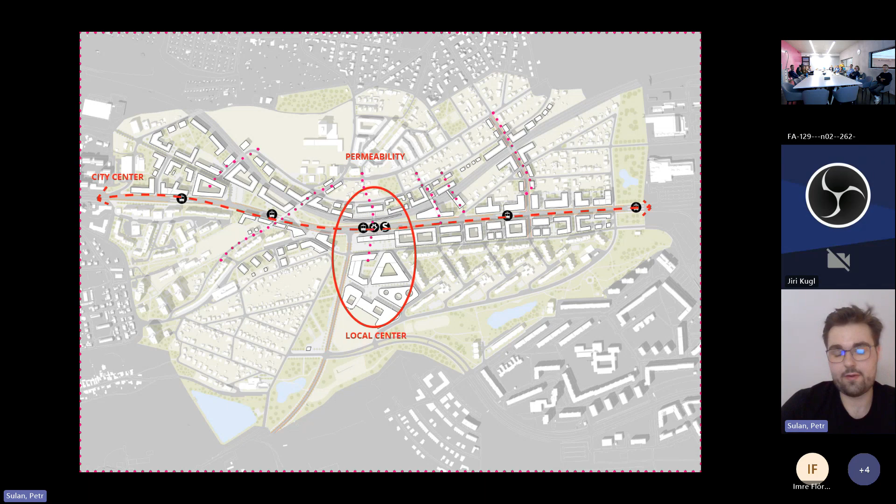I also put the metro station underground, which was a hard thing to decide, but I decided to put the metro underground to have the opportunity to build there. And you can see how through the passage all the areas are accessible.

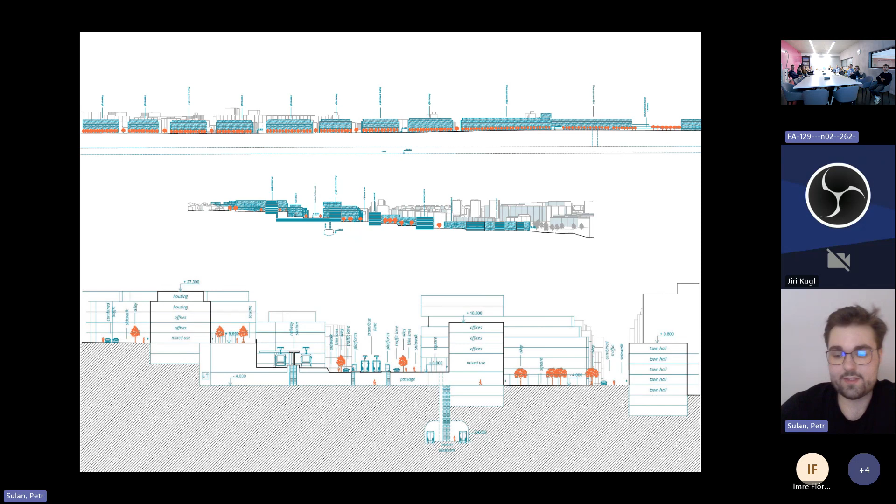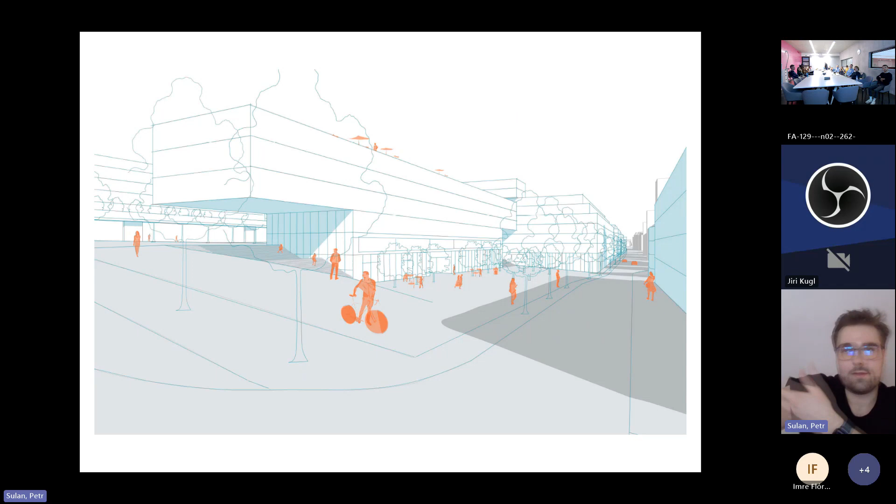Here is the visualization of the boulevard. You can see on the left side the train station. In this visualization, you can see the new square that is the beginning of the passage that allows you to go through all the sorts of transport. Also, I wanted to use the roofs for more living urban spaces.

And that's all. Thank you.

What was the involvement of the city district in your consideration?

Actually, I focused on this city district also in another subject in urbanism, where we were using space syntax and other analysis tools to find a new local center here. And I contacted the mayor of the city district, so we were in communication, and now they are trying to make a new strategy for the district for the next 10 or 15 years. So we talked about it, but they are not really good when it comes to communication. So yeah, I tried.

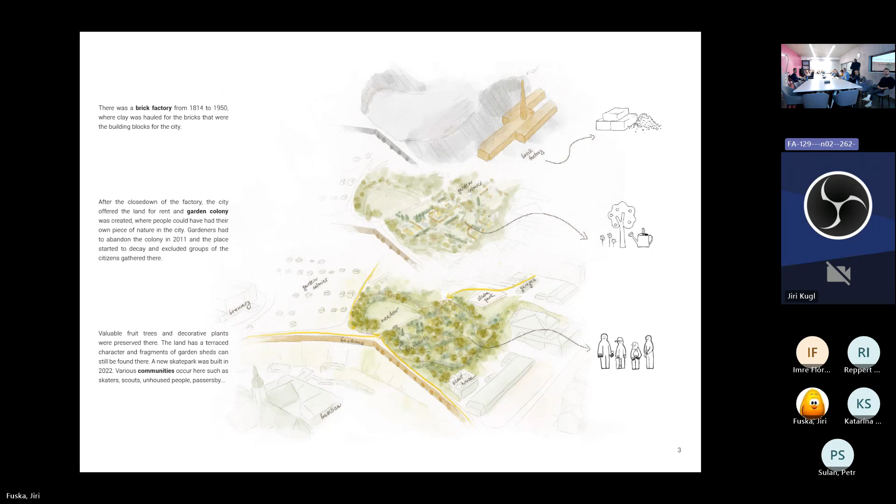While discovering the place, we also looked into its history. In the 19th century, there was a brick factory. After it closed, a garden colony was created, and afterwards, which is what the place is like right now, it became a jungle of wild plants with fragments of garden sheds, decorative plants, and fruit trees. Various communities can be found there, such as skaters from the skate park, scouts, and also unhoused people, making it a mixture of different layers of history combined into a very special place.

We did a site analysis by simply having conversations with people who were crossing the grass field, and we highlighted the most frequent answers to learn how the place feels for other people. We chose this place thinking we found the perfect lost site in the city, but after getting to know it more, it turned out the place was not so lost as we thought, but we were the ones who were lost in it.

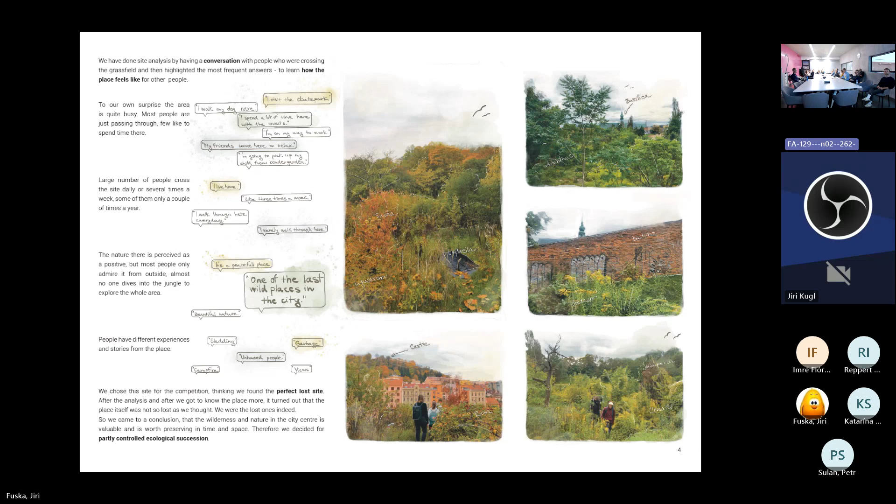We came to the conclusion that the wilderness and nature in the city center is valuable and worth preserving in time and space. We decided to approach the place with partially controlled ecological succession.

We decided to use sensitive interventions, such as replenishment of productive native species, that would result in the creation of an ideal jungle, the last wild place in the city, as described by passersby. We perceive this as one of the main values of the site together with its dynamic character. Therefore, instead of radically changing the site and destroying its qualities, we decided to transfer and extend them beyond its boundaries.

This would happen through seed bombs, or pocket jungles, created from the plants of this last wild place. With the addition of movement force in the form of people, this small intervention would create a wave of other interventions that transform urban abandoned lost sites into other wild places. This would also connect communities and benefit the environment. In other words, it would mean the return of nature to the city, or as one could say, returning the city to the nature.

Pocket jungles are capsules consisting of seeds, fertilizers, and soil, originally invented by Japanese philosopher Masanobu Fukuoka. They are made from clay soil, a mixture of collected seeds and compost from our site, and all these elements are mixed together and shaped with the help of water.

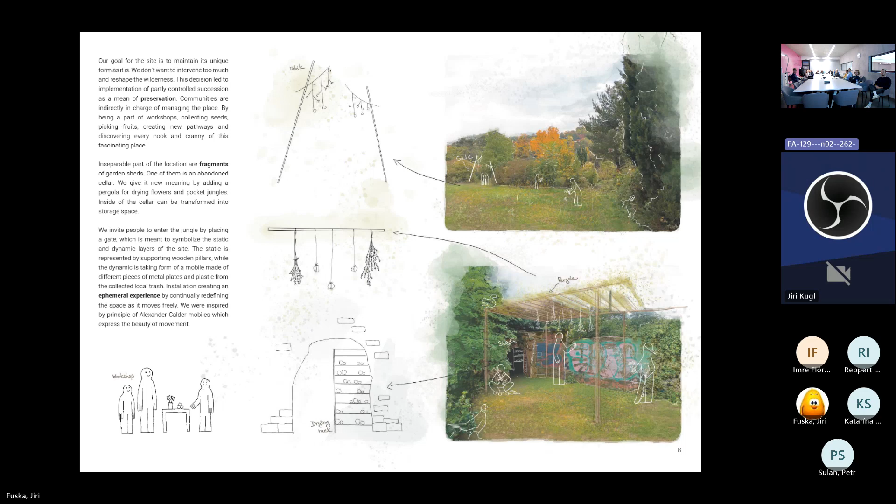Communities can be indirectly in charge of managing the place by being part of workshops, collecting seeds, creating new pathways, and discovering the place. An inseparable part of these locations are old garden sheds, and we give an abandoned cellar and previous garden shed new meaning by adding a pergola for drying flowers and these pocket jungles. Inside, the cellar can be transformed into a storage space. This whole concept of pocket jungles can help expand biodiversity across the city.

Our original lost site, from which the seeds for pocket jungles would be derived, is already a settled coexistence between nature and citizens. Not only does it have the power to change the visual of the city, but it is also beneficial in the ecological and social sphere. It also adds a deeper meaning to other small lost sites, as it provides further habitat for pollinators and small fauna. Moreover, it brings together different communities by impacting the environment of their city.

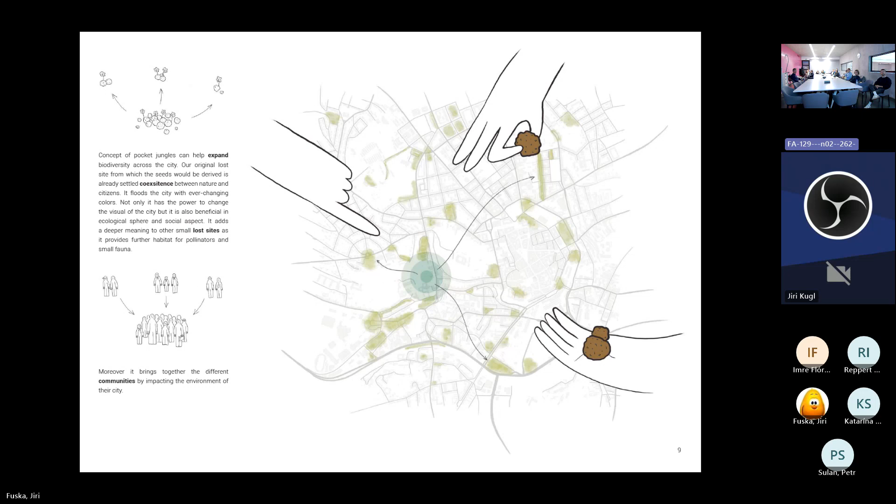I was not a member of the jury, but I followed the jury discussion, and your project really caused a long discussion, because it is something very unusual. There are no buildings and roads in the final design, but everybody felt that this should somehow be put forward, not forgotten, so we developed this special mention. I think it was a very good and brave decision of the jury to promote projects like this, which have a very sensitive approach to locations normally seen as abandoned.

So, questions. I have a question. How did you find this idea of the pocket jungle? Because it's something I've never heard of, and it's super inspiring. I wonder what was the path, how did you come up with this?

Well, it was originally invented by the Japanese philosopher Masanobu Fukuoka, who used to garden with it. He would make what he called seed bombs, and just throw them around, and the plants would grow wherever it was suitable for them. He had a lot of breakthroughs with this type of gardening, even in places where it was very hard to grow food for people. This concept was later used, I think in New York or maybe other places. It was kind of a revolution against the concrete cities.